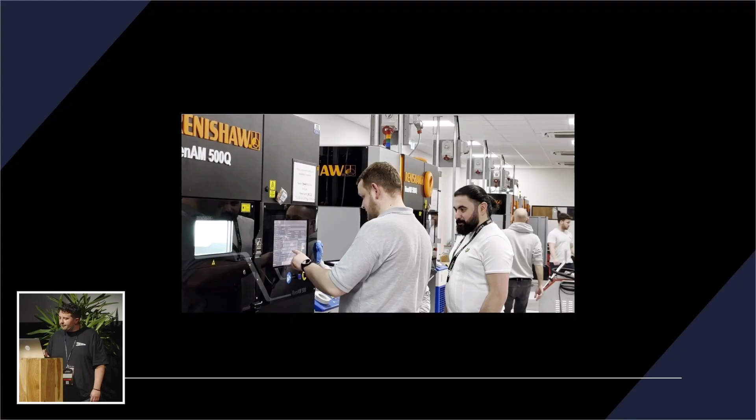So I work for a metal 3D printing company named Alloyed, based in Oxford in England. We have 2 facilities in Oxford and 1 over in Seattle in the US. It's a fantastic company to work for, and I found it really interesting over the last 3 years.

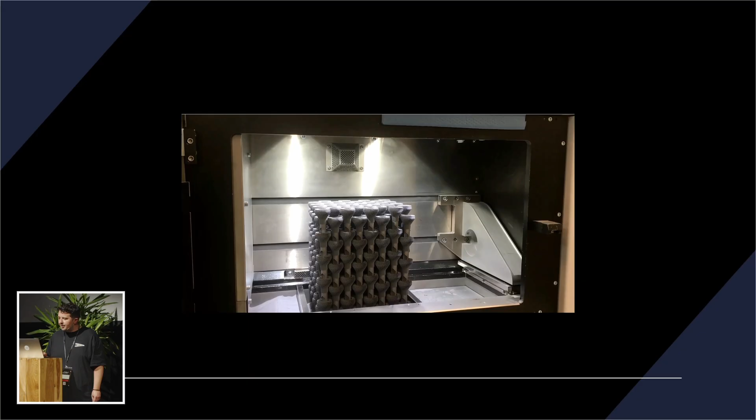So my role is operating and maintaining a fleet of 14 printing machines that use direct metal laser sintering to produce parts for many different industries, including wearable technology like frames for augmented reality glasses, rocket thrusters, heat exchangers, and custom jewelry from platinum and gold.

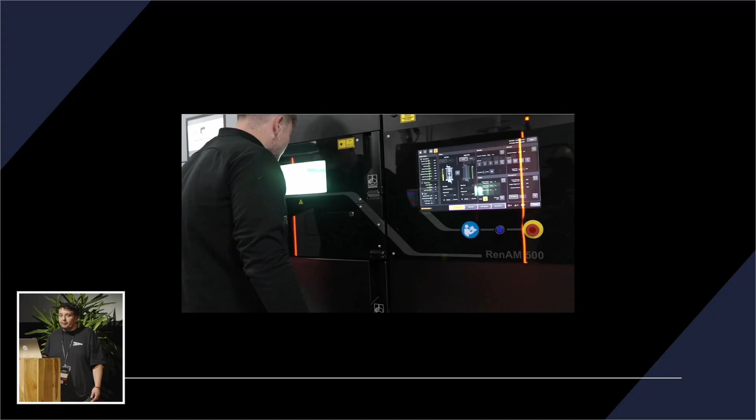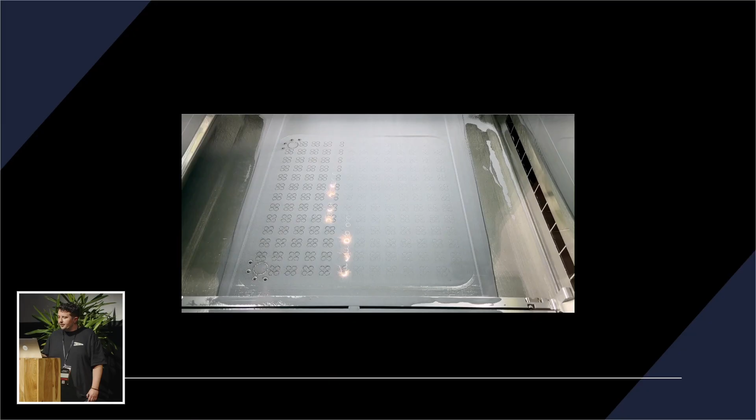Unfortunately, I can't share any videos of the really cool stuff because obviously it's all very secret squirrel, I'm afraid. But I'm not here representing Alloyed today. I've come in my own time as a fellow maker to talk to you about how your hobby puts you ahead of the pack when applying for a role in industrial additive manufacturing.

So a few months ago, I stopped at a motorway service station, and in case you didn't know what they look like, there you go. I was browsing the shelves for a sandwich to help me get through a long journey when I overheard part of a conversation between a young employee behind the counter and his colleague.

And he said that classic line that we all love: "I've got a 3D printer, I'll just print you a new one." So when I went up to the counter to pay for my sandwich, I struck up a conversation and we geeked out about our printers and home projects for 20 minutes. Then I mentioned that I work in industrial AM and explained a bit about it, and his eyes just widened. He was like, "Wait, I could get paid for this?" And he looked around the service station. You could see the cogs turning in his head, and it was almost like he'd just found a cheat code.

So now I'm not going to stand here and tell you that industrial 3D printing is the best job in the world. It can be very tedious and boring, and sometimes there can be a lot of protective equipment to wear. But if your day job's working in an office or stacking shelves in a supermarket, or like this guy working in the service station until your 3D printing business takes off, then I believe it's 100 times better and will help you in your personal projects 100 times more too. So the industry just doesn't know how to find you guys, so today I'm here to sort of recruit you for them.

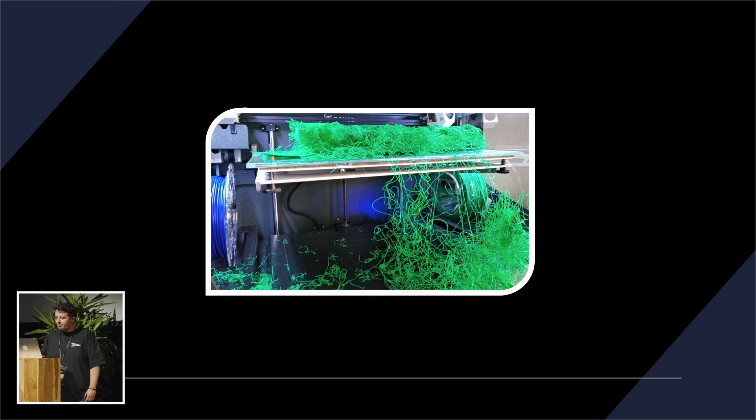Industrial additive manufacturing is exploding, but they can't find enough people who know how to run the machines. The AM industry is worth $20 billion and growing 20% yearly, but 60% of companies say they can't find the skilled staff. Meanwhile, there's an entire army of experts hidden in plain sight.

You, the hobbyists, the makers, the folks who've mastered bed leveling at 2 a.m., or who speak fluent Octoprint and who've turned failed prints into featured designs. Companies want people who've had failed prints because you understand why things fail, and your skills are gold dust to these guys. A hiring manager said to me recently, I'd take a hobbyist who's rebuilt their hot end over a PhD who's never touched a printer.

And so that's where you come in. Companies aren't looking for PhDs for operations roles. They want people who've wrestled with warped beds, perfected the cold pull, and know that just adding glue stick isn't always the answer. Industrial AM isn't some mystical realm.

In fact, operating and maintaining the machines is often easier than desktop printing. These machines are beasts, but they're beasts with actual tech support and a team of service engineers who can be on site the next day, which, considering most of the machines cost nearly €1 million, that's the least you'd expect, really, isn't it?

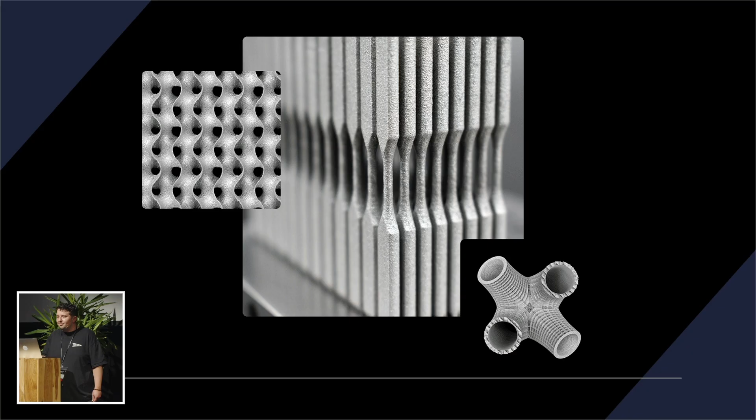Industrial AM also isn't just about pushing buttons. It requires material science know-how. Why the ABS warps and cracks relates to why titanium parts crack from residual stress. Process parameter mastery, like your 200 hours tweaking slicer settings, that's design of experiment training. And metrology awareness - if you've measured a 20 millimeter cube with calipers 50 times, you're already doing quality assurance.

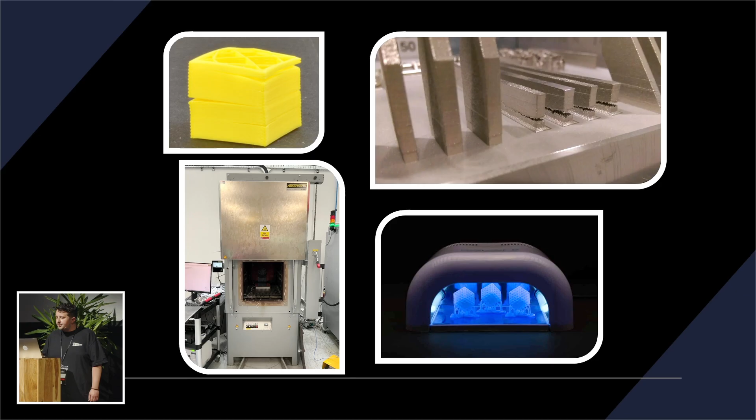Everyone's familiar with the struggle of getting a nice first layer in FDM. Well, it's a similar struggle for people working in direct metal laser sintering. If the first layer spread of metal powder is too thick, then the print will warp and peel off the substrate in much the same way the plastic does when your nozzle's too far from the bed for your first layer. And that perfect first layer obsession, in metal AM it's called recoater blade gap optimization. It's the same drama, just a fancier term.

Most metal builds need to be put in a furnace after printing to relieve stresses. And if you're post-curing your resin prints, that's basically stress-relieving metal parts, just with UV instead of an 800-degree furnace. It's the same way of thinking, just on a different scale.

At Alloyed, we don't sell parts made from plastic, but we have 12 desktop FDM machines and 3 SLA machines working flat out across our 3 sites. So if you could jump straight onto those machines and work them without even needing training, it's a big plus for your chances, and even better if you can fix them too.

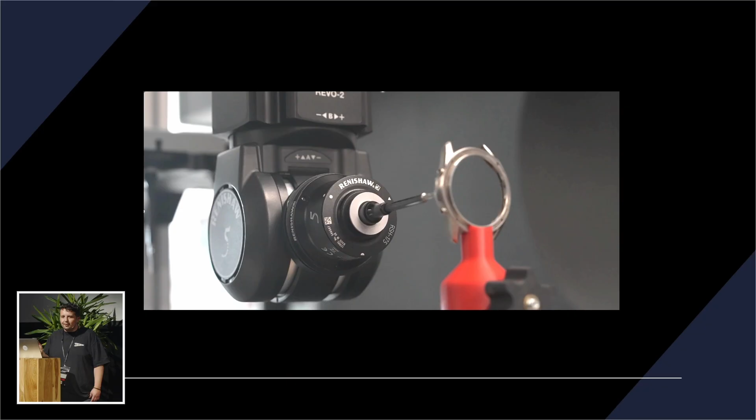Something that's always surprised me with these companies is how little some of these incredibly intelligent engineers know about other types of AM than the one in their professional field. A lot of the metals experts just don't have the first clue about plastic printing.

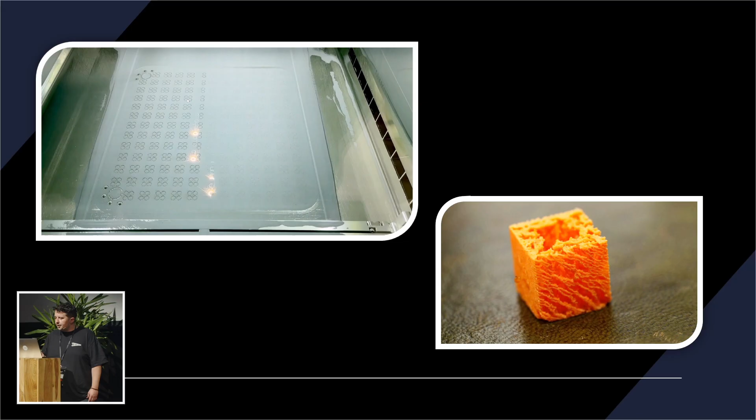At Alloyed, we struggle with the dosing and spreading of the metal powder, making sure there's enough material each layer and it isn't underdosing. If you watch this video, you can see a small amount of fine metal powder is released, and then the recoater comes across and wipes a thin layer across the build plate.

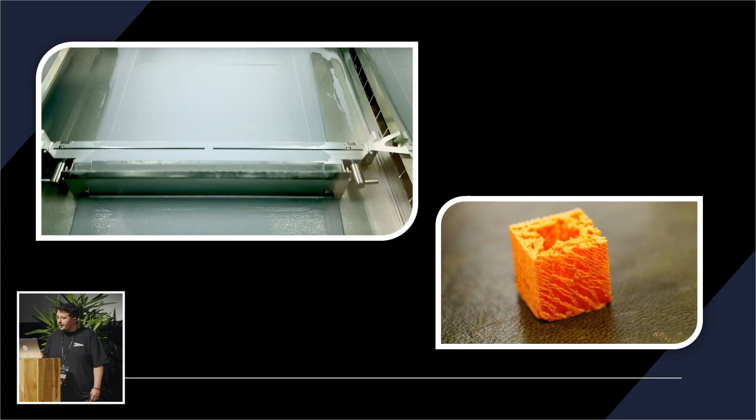After this, the laser fires and pretty much welds a layer to the metal build plate. Then the build moves down in the Z-axis by 30 microns, and the process is repeated over and over, building up the parts layer by layer.

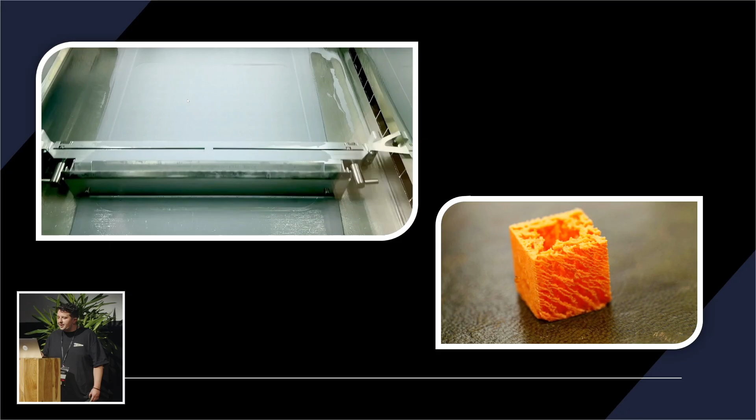Sometimes you don't get enough powder spread uniformly across the plate. It's like with FDM, when plastic can under-extrude because of a number of reasons - I certainly don't need to tell you guys that. But you have to work your way through a list of potential causes, ruling out each one until you solve the problem. And this kind of mindset is exactly what companies are looking for.

A common cause of print failure can be down to material health. Some plastic filaments are very susceptible to absorbing moisture from the environment, and some are negatively affected by UV light, so need to be stored and looked after carefully, just like resin for SLA prints.

And this is much the same thinking when dealing with metal powders. There are different reasons for poor material health, but if you keep the metal powder in a sealed container, keep a constant temperature, reduce exposure to oxygen and moisture, you're going to have a much better time of it. And if your build does fail, you can save lots of time with your diagnosis of the problem if you can already rule out a few potential causes.

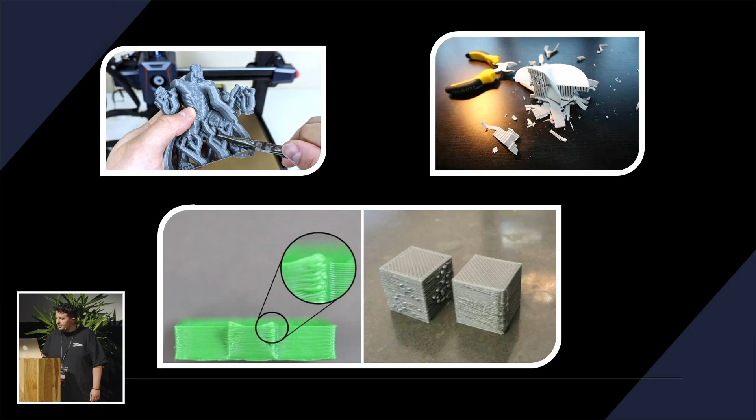Support removal requires similar skills across most types of additive, but thankfully with plastic there isn't so much of the personal protective equipment and fine powders you could breathe in to worry about. But it still requires a great deal of skill to remove supports without causing damage to the parts.

And one last similarity: over-extruding in FDM is the same in metal AM as overbuilding, which can be caused by poor printing parameters or poor material health.

So I hope you agree there's many similarities. I think that as the industry struggles to find people with the skills to operate AM machines, looking towards this community for at least part of the answer is the way forward.

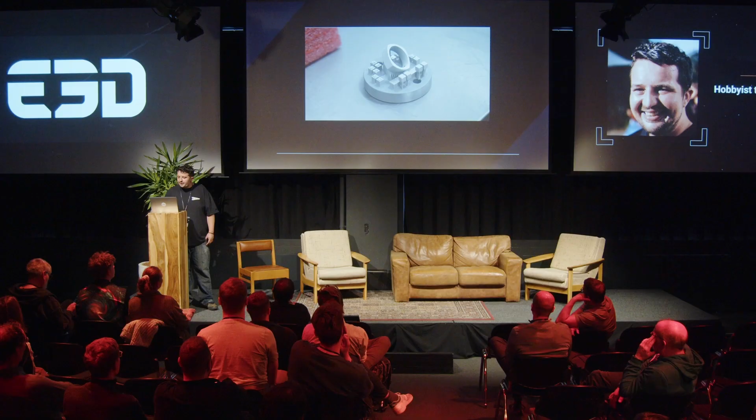If you've tuned retraction to fix stringing, you can understand the process to optimize laser parameters for metal. Both involve swearing at tiny imperfections no one else notices. And your 0.16 versus 0.2 layer height debates - in DMLS we argue over 30 micron or 45 micron layers and how it affects the grain structure of the metals.

So if you're juggling multiple Creality printers, well, that's workflow optimization on your CV. You've got the multitasking chops to manage an industrial AM floor. My friend's Ender 3 farm taught him more about batch production than his engineering degree.

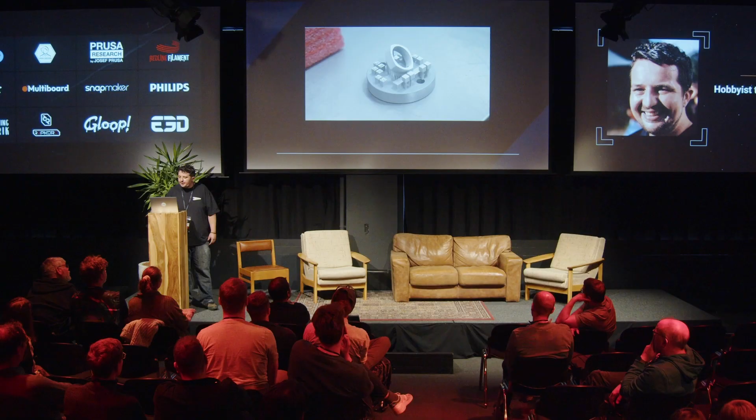And you know how PETG needs different temperatures than PLA - well, that's the foundation for understanding Inconel 718 versus titanium 64 print parameters. Why aluminium alloys need heated build chambers. And like I said, how moisture affects metal powder, like it ruins your nylon filament.

So, let's talk money. My first AM job bought me an Ender 3. My second, an Elegoo Mars, and my current role—well, let's just say my garage now looks like a university makerspace. This isn't just about buying new toys though. That salary funded my trip here to Amsterdam. It's funding my future business, and it will fund yours too, whether you dream of printing cosplay armor, launching a prototyping studio, or even becoming a 3D printing influencer like some of the fantastic people I've shared this stage with.

So, over the border in Germany, you can find some of the highest salaries in Europe, especially for senior roles. A lot of companies also offer 13th and 14th month salaries, and some senior applications engineers are on over 100k. An AM technician at entry level would be looking at 32 to 40,000 euros, an experienced one 40 to 50, and an AM engineer at entry level would be 40 to 48,000, experienced 48 to 80,000 plus.

And here in the Netherlands, salaries are a bit lower than Germany, but the 30% ruling means a big chunk of your income is tax-free if you relocate here. There's also a mandatory 8% holiday bonus on top. AM technician entry level, 30 to 38,000 euros, and an experienced one 38 to 48. An engineer entry level 35 to 45, experienced 45 to 65 plus.

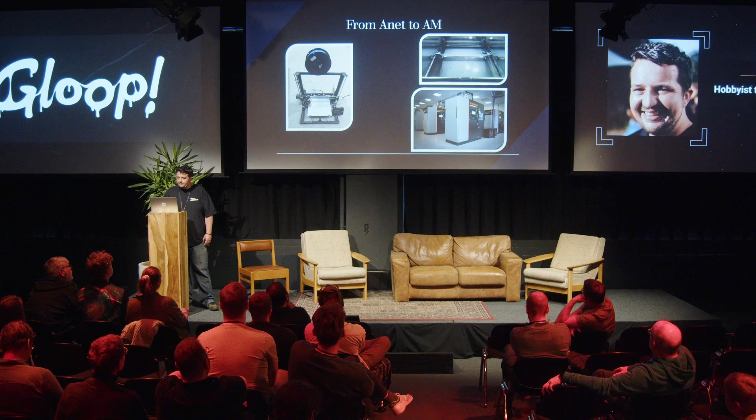So I wasn't some engineering prodigy. I worked in many jobs across many sectors before finding my home in 3D printing. I was actually quite set on becoming a chef at one point in my life and went to college and studied it for a couple of years while working in a restaurant. Unfortunately, I was a very angry chef, and it was a very stressful job. I didn't have Gordon Ramsay's talent, but I had his temper, you know. And I think if I was still in it today, I probably would have had a heart attack by now.

So I started with an ANET A8, if anyone else used to have one of those. And it caught fire twice, so I learned about electrical safety the hard way. Then I learned how to download and slice files from Thingiverse, then how to CAD my own models, and I was hooked. Then an AM engineer changed my life. He'd been helping me get to grips with the ANET and was impressed with how quickly I picked it up. And he said, well, if you can run this thing, you can run an industrial machine. And I thought, well, me, work with metal printers? I laughed at the time, but he was right.

He was setting up two Renishaw metal printers for a company and had nearly finished with the parameter development. It was about time to go into production, making customer parts, so they were ready to hire a 3D printing technician to operate the machines. So with my friends' help and my FDM knowledge, I managed to land the job of additive manufacturing technician.

My first week on Renishaw machines, I learned that metal powder is 100 times worse than glitter for just getting it everywhere. Personal protective equipment is non-negotiable, so there was no more printing while just wearing my underwear like I did at home. Sorry for giving you that image.

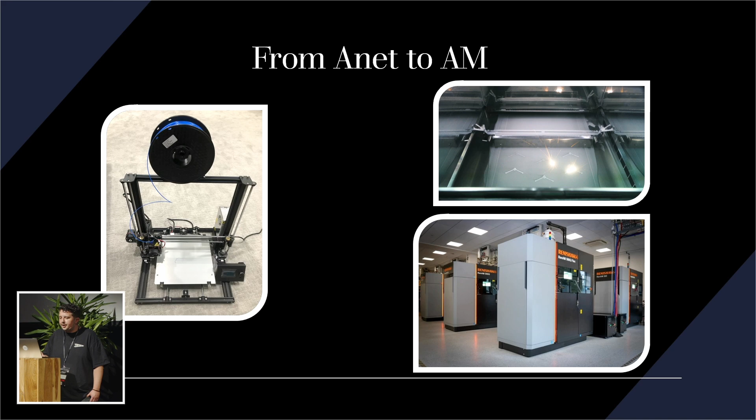But this isn't a one-way street. I've always been comfortable with machines and with coming up with ideas, but selling my ideas and public speaking has always held me back. In my job, I've held meetings with directors and CEOs, given presentations to whole company events, and represented the company working on the stand at conferences and trade shows across Europe.

And this has given me the confidence to stand in front of you today, something I couldn't have dreamed of doing 2 years ago without anxiety taking over and having a massive panic attack.

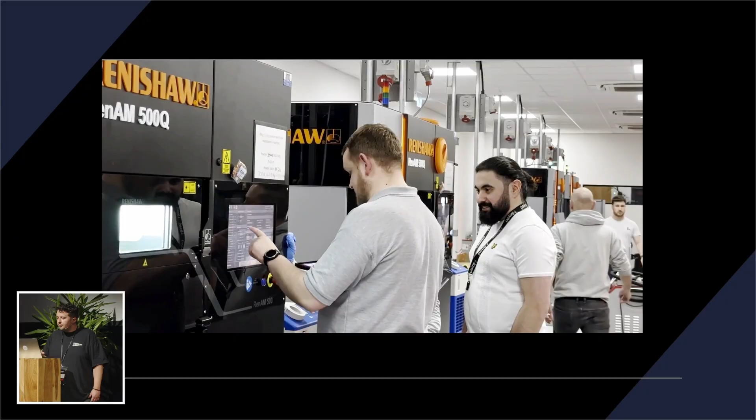So I've got money in the bank, skills at my disposal, and connections across 3D printing. And with the skills and salary I've gained over my career, I'm now in a great position to follow my dream to start my own company.

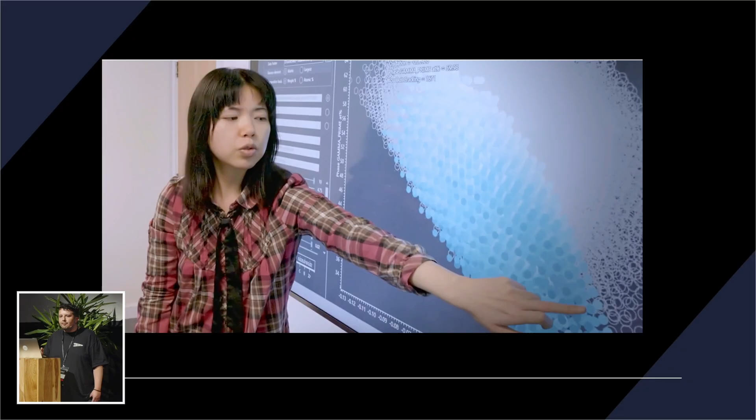I'm very interested in making high-end interior design items like light shades, lamps and vases, but from recycled materials. There's a company in the UK named Fishy Filaments that make filament from recycled industrial fishing nets that would otherwise end up dumped in the sea or thrown into landfill.

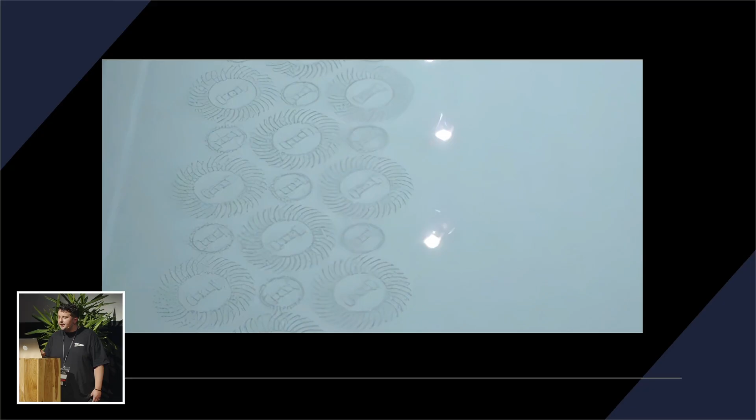And I think if I can open a shop near the coast and the seaside, and you can actually see the fishing boats from the shop, this would be a big selling point.

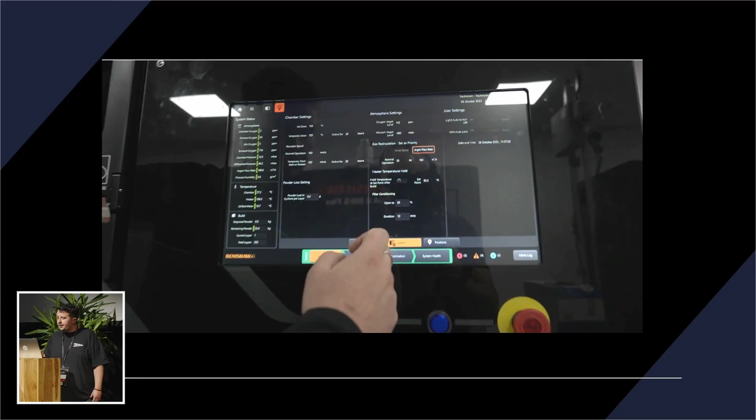I want to spend the next year working on this plan. I'm going to take a course in interior design. I need to work out what would be the best printer for this material, as I'm pretty sure I'm going to need an enclosure to print nylon successfully. And I need to research where would be the perfect coastal town for this.

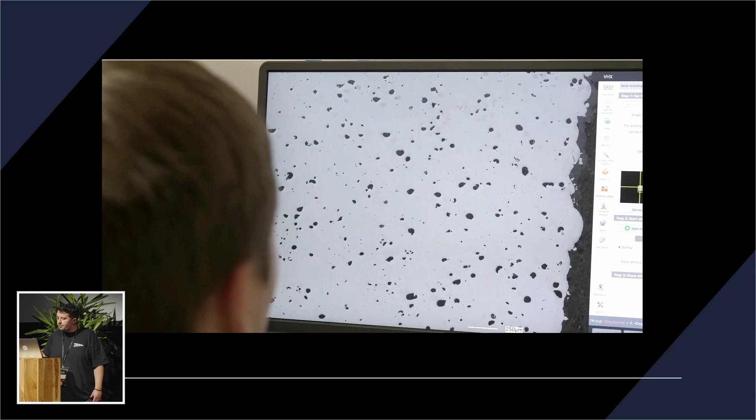But thanks to my career, I can afford to do this. It's certainly not my dream to be running printers for somebody else for the rest of my life, but it's great for me right now.

So, homework. Rebrand your resume. If you fix clogs, you've resolved extrusion issues. If you're juggling multiple printers, put it down as workflow optimization experience. Think about how you word things that would stand out to potential employers.

And build a portfolio. Show your failures, and more importantly, your fixes. Show your next employer that you have the problem-solving initiative they are looking for.

And network today. This amazing event is a great opportunity to network. It's very rare to have so many great minds from the world of 3D printing in one place. And also consider signing up to LinkedIn and build your connections there.

I know it can be pretty boring and cringe on LinkedIn, but it's also where I found my last 2 jobs. And also find me after and I'll share recruiter contacts and you can tell me about the cool projects you're working on.

So, in conclusion, you don't have to choose between passion and paycheck. The industrial AM world is begging for people like you, hobbyists who treat prints like puzzles, makers who see failure as R&D, and tinkerers who'd rather calibrate than sleep.

Take that skill set, land a job, and let them pay for your next printer. Let them fund your side hustle. And when you're ready to go solo, you'll have the experience, the network, and the cash to make it happen.

So why choose between hobby and career? Why not both? Thank you.